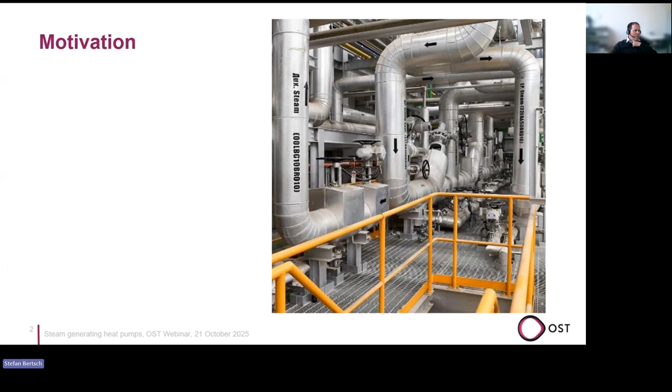Thanks a lot, Cordin. My topic is not as technical as the ones we had before. So I want to go one or two steps back. Why do we need heat pumps? Why do we need an electrification? I think Guido Sutter already showed it quite nicely, that in most processes you need heating and cooling. The product goes in at the same temperature, where heat pumps are one of the best possible solutions. So in Switzerland, I'm taking the Swiss perspective today. Many of these points probably also stand for other countries as well.

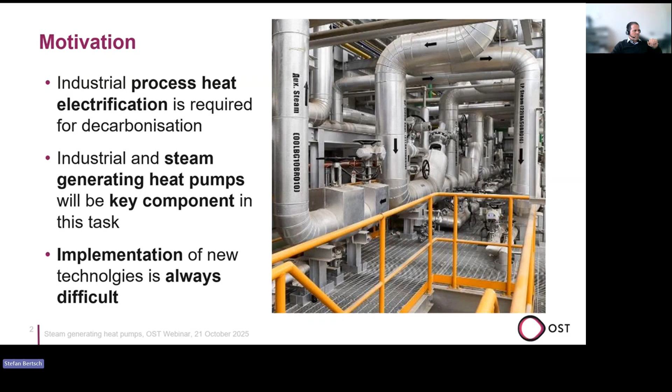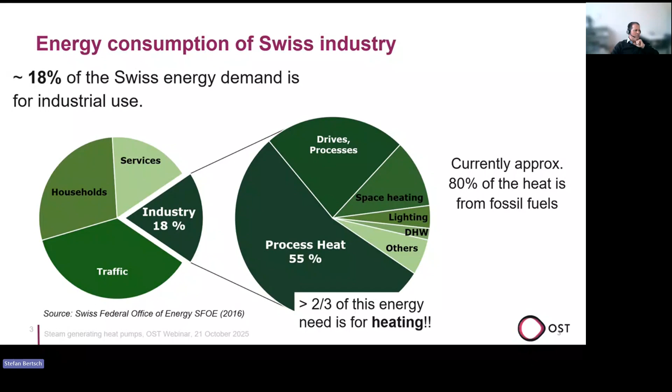In Switzerland, industry is only about 20% of the total energy consumption. That's fairly small, actually, for an industrialized country. And 2/3 of that energy that is used is actually heat. It's process heat, it's space heating, it's domestic hot water, and so on. And 80% of that is produced from fossil fuels. So that's the state of the art at the moment. And heat pumps are one of the natural solutions we can use to get there.

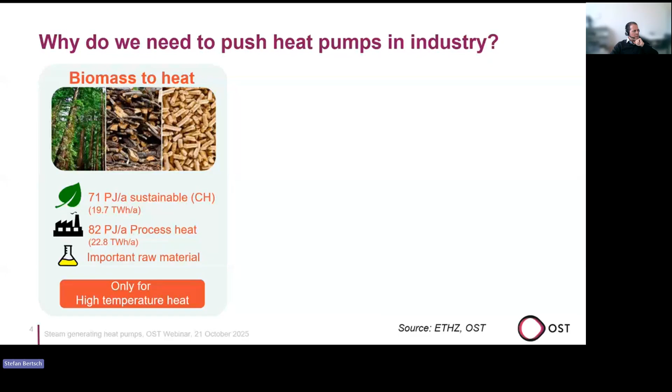In Switzerland, at the moment, we see a huge decarbonization using biomass. So almost every larger company that needs heat is starting to go into biomass, which we think is actually not the optimal way, because, for example, the sustainable potential of biomass heat would be 71 petajoules, whereas the heat demand in industry is about 82 petajoules. So we couldn't even fulfill the demand with all the wood we can plant sustainably.

And wood also has a lot of other functions. Wood is a seasonal storage. Wood is an important raw material, especially if you look at the plastics industry, in case there would be no oil at one point. So then the only other good solution is actually electrification. And you can go for direct electricity. So from 1 kilowatt hour, you get about 1 kilowatt hour in heat. You can use synthetic fuels, one topic we hear a lot, you can go into hydrogen, methane, and so on. The problem there at the moment is the conversion efficiency to heat is only about 50 to 70%. The higher processed it is, the lower.

Or you can go with the heat pump. So if you look at the heat pump, for example, in comparison to synthetic fuels, you have a factor of 4 to 8 less energy need. So at the moment, we are not in an area where we have an abundance of renewable energy. Therefore, wherever we can, we really need to go for heat pumps. In the long term, if you need additional storage and so on, synthetic fuels might be a very nice option. But right now, as the energy system is in Europe or in most countries, heat pumps are really a necessity.

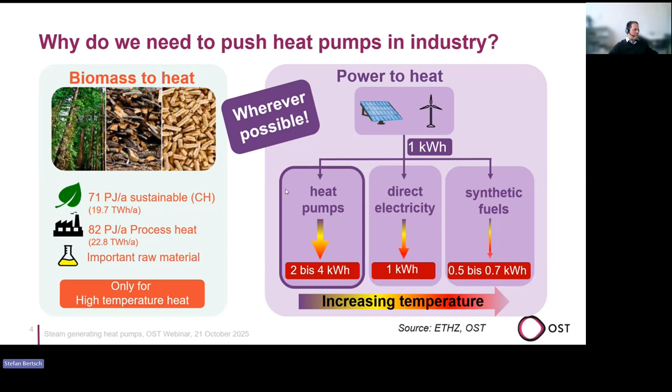So where do we stand with respect to market adoption? High temperature heat pumps are really new to the market. We are not even in the early adopter phase, we are in the pilot demonstration phase. So there's still a big way ahead of us. If we compare that to residential heat pumps, in Switzerland we are at about 65%, almost 90% of the new buildings are equipped with heat pumps. That's a completely different stage.

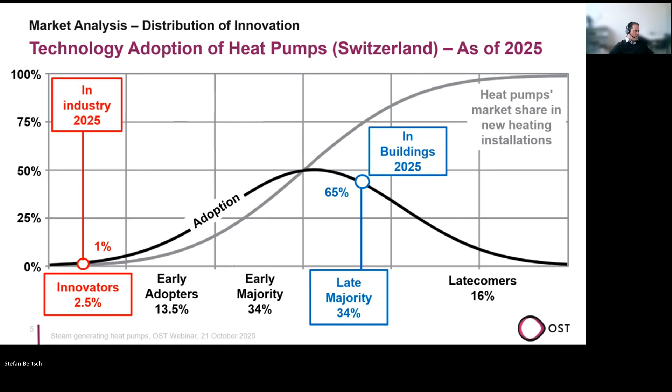So we ask ourselves a lot, how can we actually challenge industry? How can we challenge also our government to implement heat pumps faster? And so that's one of the major topics I'm going to talk about. So I really like what I see today.

When we look back to 2018, that's not long ago, Cordin actually did an overview of what kind of high temperature heat pumps we see at that point. If you look into 2024, we have a completely different temperature range we can achieve. We have very big capacity heat pumps. We see more and more heat pumps using natural refrigerants. So we really can see that the market is growing. Very, very good news. And we also see that industry actually has the intention of implementing them.

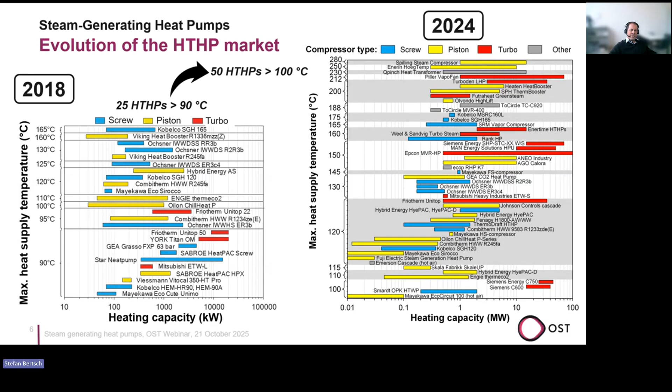Still, we usually get the question, so where can I look at the system? Where can I see one running? And the answer is still very often, well, that's not that easy. So it's really how do we get the market started? We also try to optimize implementation of heat pump systems. So there are different ways you can integrate a heat pump directly into a process, into a machine.

So for example, if you're producing cheese, on one hand you need to heat it up, on the other side you can cool it down. You could make a machine that has a heat pump integrated. The advantage, you very often have simultaneous heating and cooling. You're less dependent on the grid. You only need electrical power going into the system. You have less waste heat. It's very easy to actually grab the heat also. So that's one idea.

Usually it's a different way. At the moment we have one power plant in a factory that produces steam or high temperature heat with a gas boiler or other fossil fuel boiler, and people try to replace just that steam boiler, which in many cases is also not the optimal solution. So there are different ways of integrating, and what's important in my eyes is not just to replace a boiler, but to figure out what is the correct temperature. How should we implement the system?

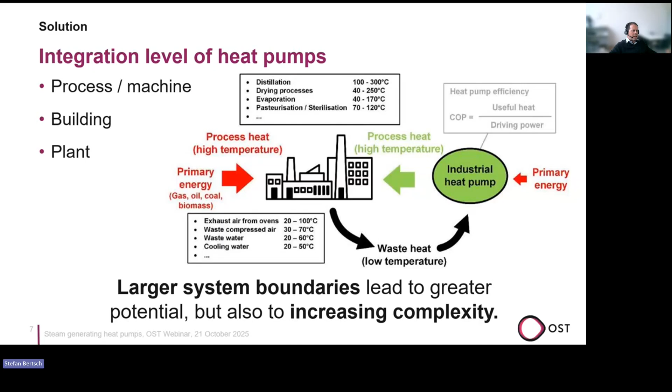We can see different examples. We have companies that are actively reducing temperatures. They have a gas boiler at the moment, and they're reducing steam pressure to see at what temperature the process would start to fail. And that's one approach to figure out where is the limit, how low can we go, because many processes need quite low temperature.

So for decarbonization, it's really important to collect the energy data. So whenever there is a change in a system, let's install power meters, measure the flow rates, measure the temperatures. They will really help to bring a much better system later on. Even though it costs in the beginning, you will save in the long term. Energy analysis is very important.

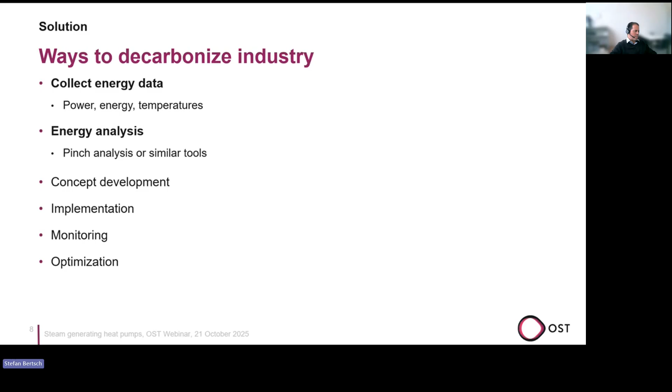One of the case studies we heard was not industry, it was a hospital that actually has a centralized heating system and needs steam. It's very easy to see what temperatures and what powers at what temperature level, but in most companies it's much more complex. So from the energy analysis, it should go into concept development. Then comes implementation, monitoring, and optimization.

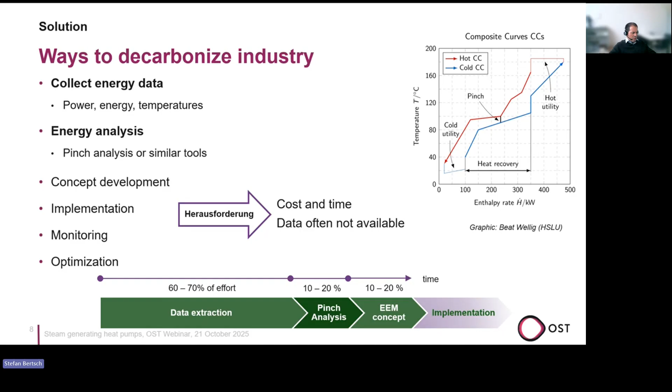What we have seen so far, the data extraction, to really get some data on what the processes need, is about 60 to 70% of the effort if you're designing a new system. The energy analysis and coming up with a concept is actually fairly little effort compared to getting the data. And in Switzerland, there is actually funding to do this energy analysis, but not in other countries. And since this first part is actually a very big topic, there is also research going on into how we can get this data much better.

For example, what we can see here are the temperature enthalpy curves of different processes, all anonymized, of approximately 200 different plants in Switzerland. And what we can see is that most temperatures on the hot side are in the area of 50 degrees, 90 degrees, 100 degrees. There are actually very few processes going up to 200, 250 degrees. So if you supply at 200, for example, the red curve, it would have been much better to have a heat pump supplying at 80 degrees. And then you already have 80% of the heat at a very high efficiency.

And then for the last 20%, you can look either into a very high temperature heat pump or sometimes even into electrical heating if, like here, it's this little energy. So what we try to do in the project DECINEL, which we are part of besides the University of Geneva and University of Lucerne, is to collect data to make representative curves so that in the future you can say, I'm in a cheese factory, they produce this many tons of this kind of cheese, this many tons of yogurt, and from there you can deduce what temperatures they actually need at what power. And this could help us to design much, much better systems.

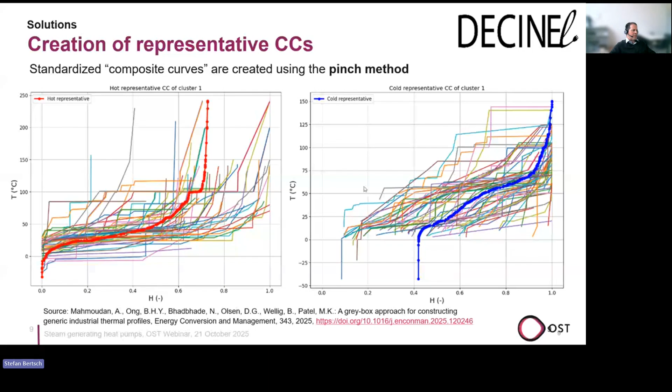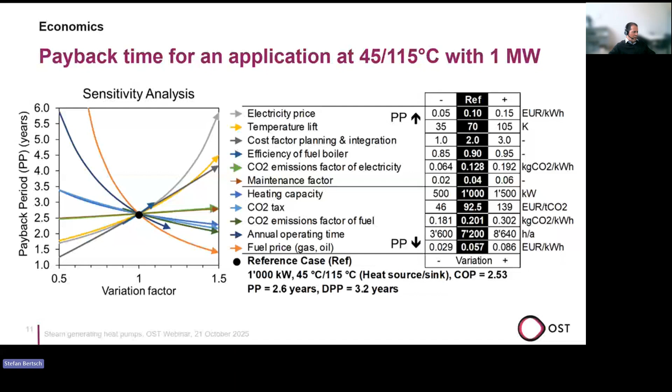If we have countries that have very cheap electricity, then heat pumps are much easier to sell from the beginning. If not, then it's much more difficult. Overall, I think electricity prices will come down. We've heard that before, because renewable energies will supply at very low prices. So long term, I'm quite sure that the cost ratio for electricity will go down. Then the second biggest factor is annual operating time, and then temperature lift. So fuel price, temperature lift, and operating time are the biggest factors in how to get a good return on investment.

So what do we need from a technical point? We've heard it already today. Steam compressors: everybody is yelling for small scale, medium scale steam compressors. So that's definitely a topic. We also need combined solutions, including storage. So far, these are relatively new systems. So very often it's a heat pump, very often still with a backup heat source, and optimized control.

What we also need is data from successful installations to show how things are going. So we're trying to collect them and make them public in anonymous ways to really help accelerate implementation. And what would also help is standardized systems, and also standardized testing to have a better comparison. I know that's still quite a bit out.

What we also need, and I think as urgently, is really from the policy side. We need de-risking of pilot installations. As I mentioned before, many companies ask, where can I see a unit? Where is something running? We need to demonstrate that it works. Sometimes grants, sometimes credit lines without interest could be an option. So not even that expensive for a government, but that's one thing we really need.

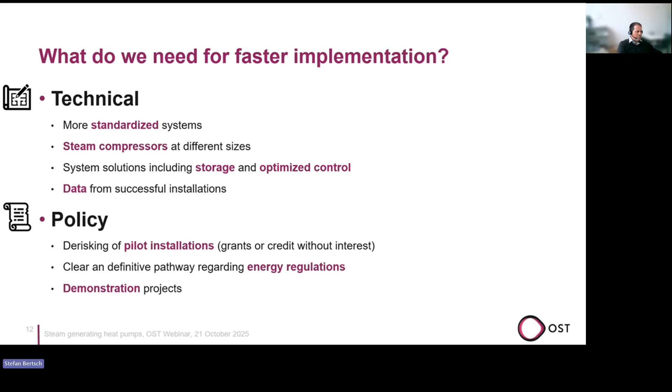We also need very clear energy regulations. We can see it with the electric car market, how the uncertainty of whether it's going to be electric or not is really hindering the market. Same thing here. The more stable regulations are, the easier it will be to adapt to them.

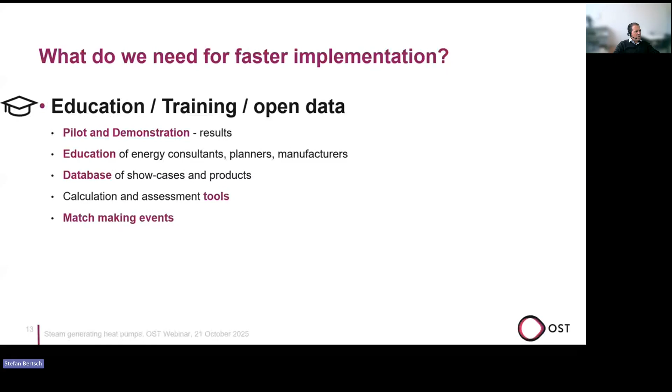And we also need education, training, and open data. That's what I already said. We like to collect and publish the data. We like to collect and build databases of what products are on the market and where someone has installed a pilot, to have some easy assessment tools to really get into contact and start talking to the customers.

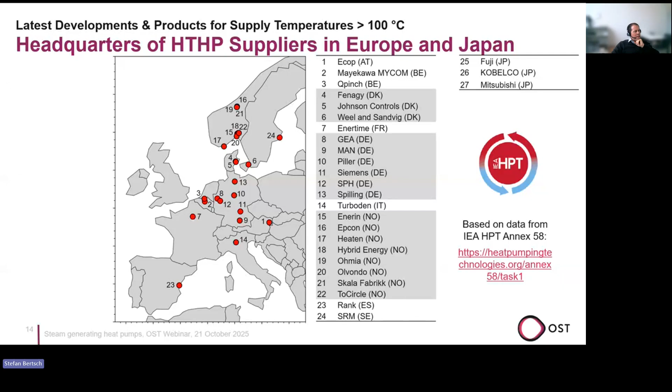So the IEA HPT Annex 58 was especially on the different producers of high temperature heat pumps. I don't know why they're all vertically aligned, but it seems like this is a very good stretch to produce high temperature heat pumps. And it also started collecting more and more pilot plants and installations. There is also now a database out there. If you're interested in bringing your product onto that database, you can contact us. It's a collaboration between Germany and Switzerland to really help bring different products closer to the customers.

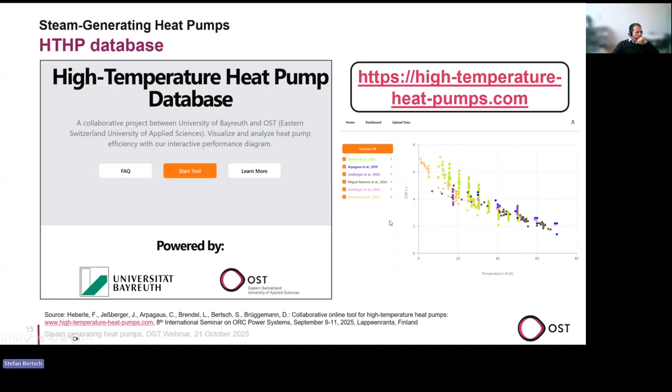What else? We also did several studies in Switzerland on what are the key factors why someone does not implement high temperature heat pumps. For example, many of the replies were: energy cost is so low, it really doesn't matter. It's below 1% of our turnover, so we don't care about it. We are producing X, Y, and Z. We are not energy people.

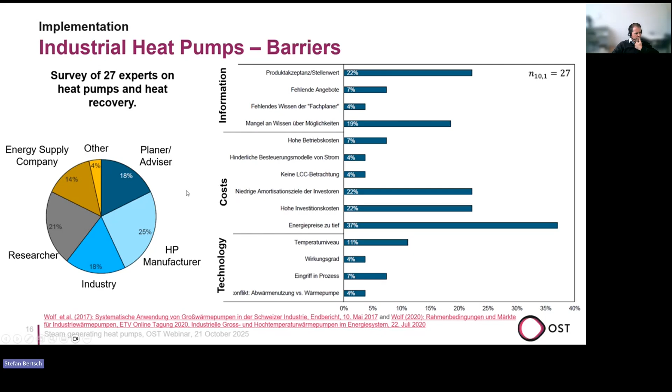Another problem is that there is not enough information, and I think we all can battle that together by combining the information, putting it on platforms, and bringing it forward. So here, two different calculators. They're very simple payback calculators. One is an online version with different countries. The Excel sheet here allows you to adapt more by yourself to easily do a calculation. How much would the energy price be given a certain heat pump, given a certain application, certain temperatures, to show a little bit of a comparison very quickly to, for example, fossil fuel systems.

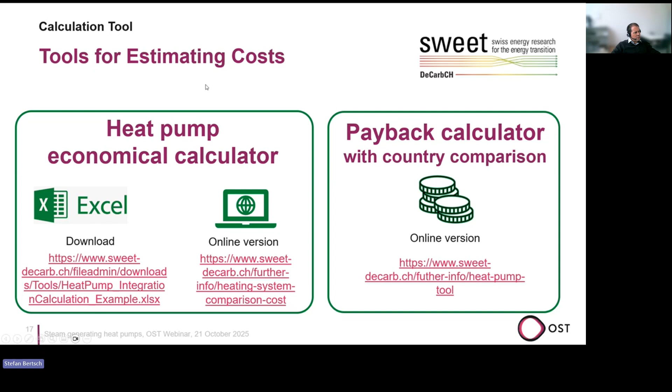So if I would be a heat pump manufacturer, where should I go at the moment to install heat pumps? I probably would go to Sweden because gas and electricity have almost the same cost. So you need a COP of 1.1 to be competitive already. And that means, reversed, if you have about 50% Carnot efficiency, you could do a temperature lift of 200 degrees. Quite nonsensical as a solution, but still it shows us which countries will see really a surge in high temperature heat pumps.

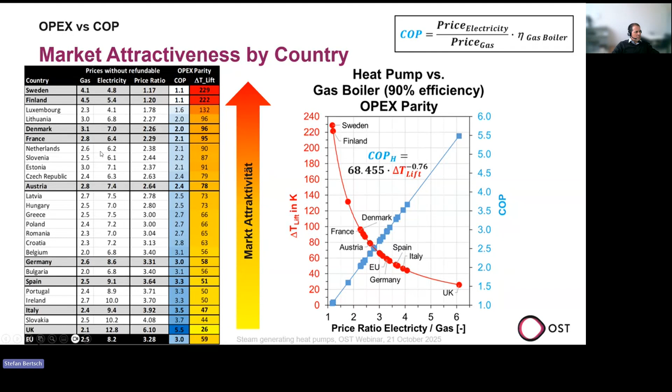Which countries? For example, if we see here Slovakia with a ratio of 4 between gas and electricity, you need a COP already of 3.7 in order to be competitive from a market price. So this could also probably help a little bit to figure out which countries can be within the early adopters.

And last but not least, it's not just about the technology, cost, and implementation. It's also about: are there different business models? Since we had the feedback of, we are not energy providers, it's not our business to invest too much thinking. We can burn something, but we cannot handle the complexity of a heat pump, for example. So there are different models also. It can go into contracting or leasing or heat as a service. If you go a little bit further, even energy as a service, then you can have combined heating, cooling, and power, and not just the heat pump. So I think there's also quite a bit of area for new business models and proposals to really push the new technology.

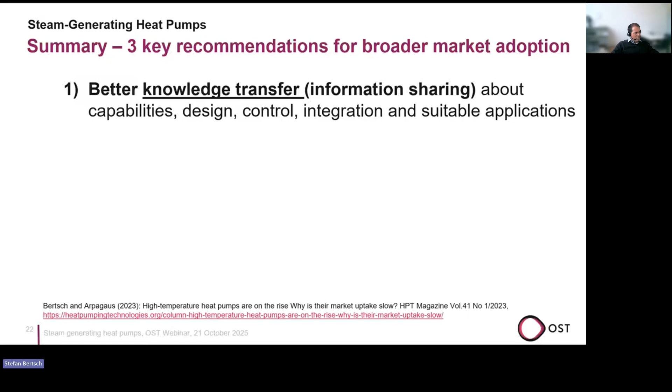So, summarizing my talk, we need a lot better knowledge transfer. We really need to share information. I know we have competitors in here, but I think if we can go ahead and work with anonymized data to really show and ascertain that the topic is of interest and the heat pumps work, that could help all of us. Standardization would definitely help for certain applications.

For example, a 3-bar application, more or less similar applications, including storage and so on, to really make it less of a challenge for installation, and really come up with guidelines and train the qualified personnel. And I'm also especially talking about planners here, about energy consultants, since many of them still are used to the fossil age and therefore don't have the knowledge they need. So that's a few things we are trying to do.

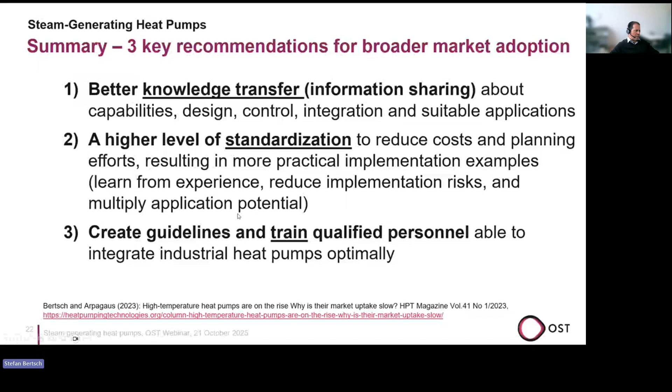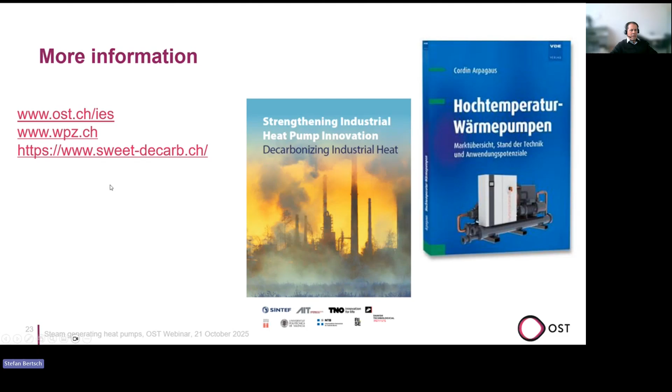So thanks a lot. Super, very good presentation, Stefan. Very clear, like always. So he wants a raise, I guess. So you showed